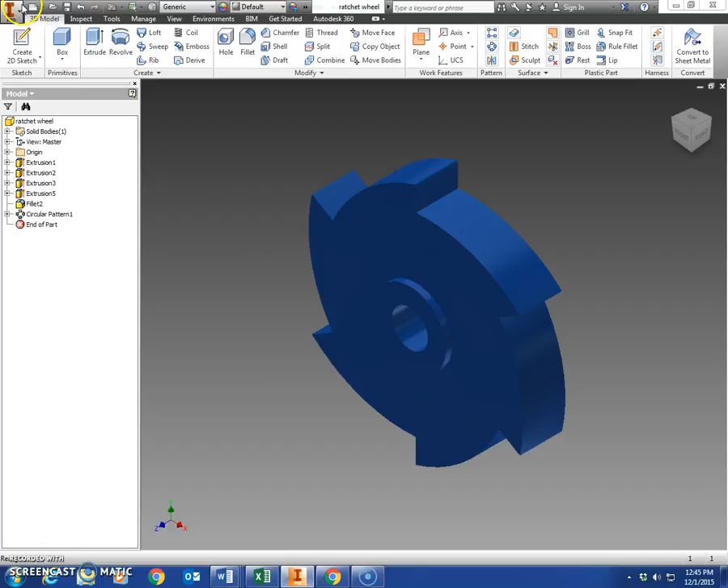Alright, so to make a new part, go on iPro, new, standard.ipt, and of course we're going to draw this in the X and Y plane. We want to make a 40-inch circle, and if we look back here at our dimension sheet, from the bottom to the top of that is 7 inches, or 6 inches actually. The 40-inch circle is 6 inches tall, so we're going to extrude that 6 inches.

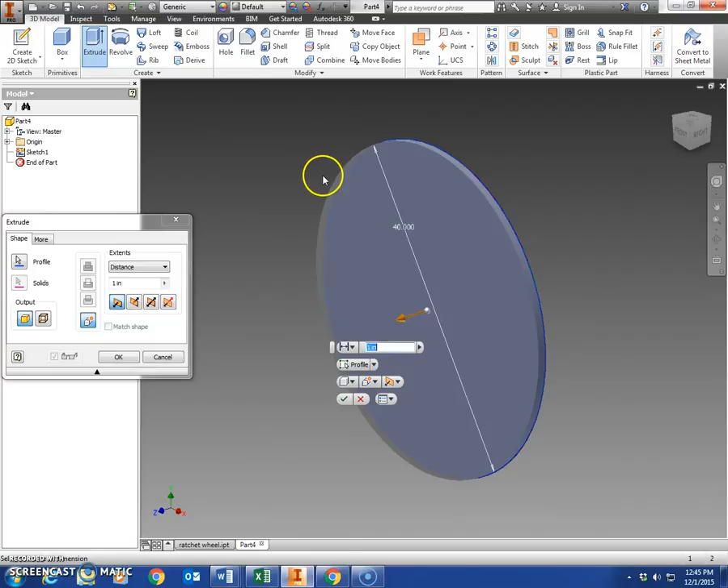Create your 2D sketch here on the surface. And we're going to make this a 12-inch circle. And this is how we get to our 7. Since last time we have a 6-inch circle here, we extrude this shape 1 inch. Okay? It's kind of hard to see there unless you highlight it.

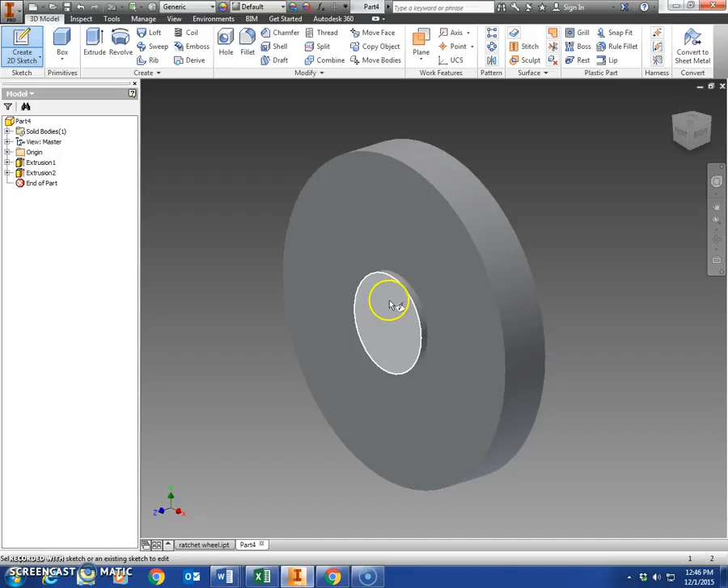And then we're going to make one more circle, a 6-inch circle that is cut out through the center. So 6-inch circle. Finish that up. Extrude all the way through. Alright, so we're starting to take shape here. You can see circle, 12-inch circle, 6-inch circle.

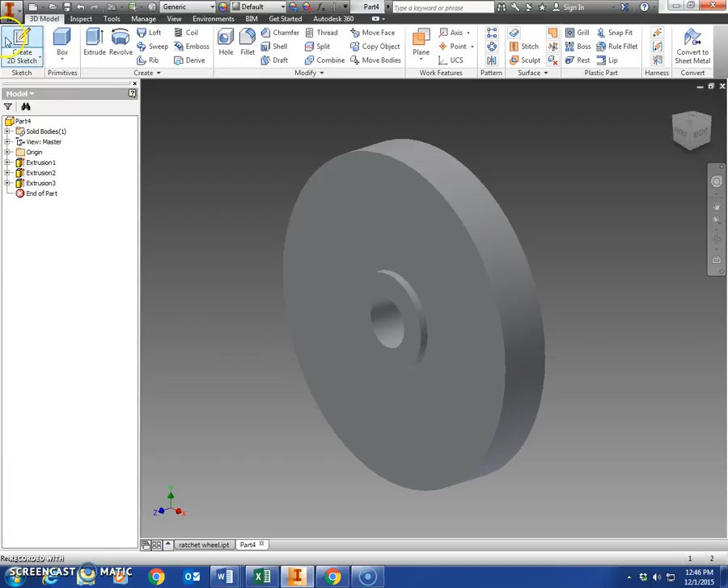Now to draw the tooth here. To do that, we're going to click on Create 2D Sketch and click this front face right here. And as you can see, we have a 4-inch line that comes down right here. Let's draw that.

4 inches. Enter. Now, what you can't see here is basically a line that comes straight down, and a line that goes out to the side of the circle here, and there's a 60-degree angle there. So we're going to draw this line on down to the center. We're going to draw it out to the side. Instead of typing in a dimension for inches, we're going to type in a dimension for degrees. We want 60 degrees. Hit enter, and it should have connected that.

Let me back that up a little bit. Line, drag it out here to the edge, okay, then change your degrees to 60. That was my mistake. Enter. Nope, went outside. We'll get this right here in a second. Line, out to the edge, and then when you tab over to degrees, make sure,

or tell you what, just go ahead and click here, and then we'll force it with dimension this line to this line. Now we'll force it to be 60. There we go. Alright, now this is where we can do something a little bit different.

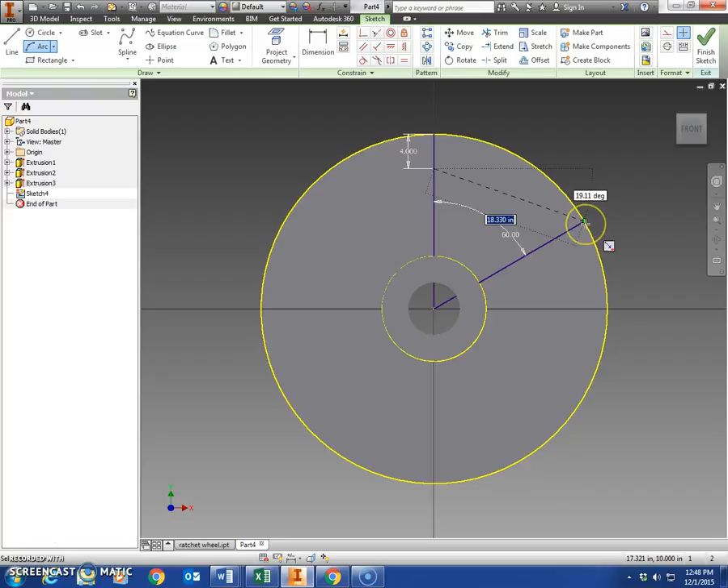We're going to draw an arc from the end of this 4-inch line right here, okay, out to the edge down here. Alright, and then when you do that, it wants you to give an angle. Okay, so make this 23. Oops, 23. Okay, enter. Now, you can trim all the rest of this stuff out. You don't need the rest of that. Alright, so you're left with that piece right there.

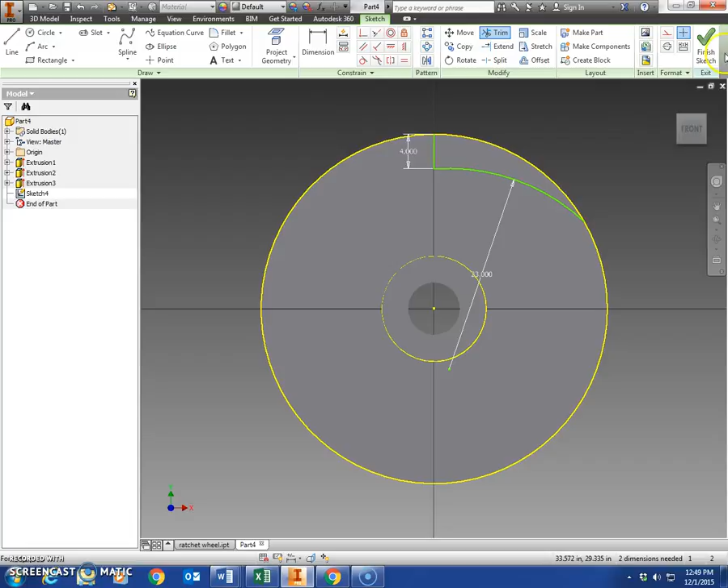Finish the sketch and extrude that piece. Change that to all. Click OK. Now, if we look back here at our dimension sheet, it says the edge of this is rounded off 1/2 inch. So we're going to fillet that 0.5 inches.

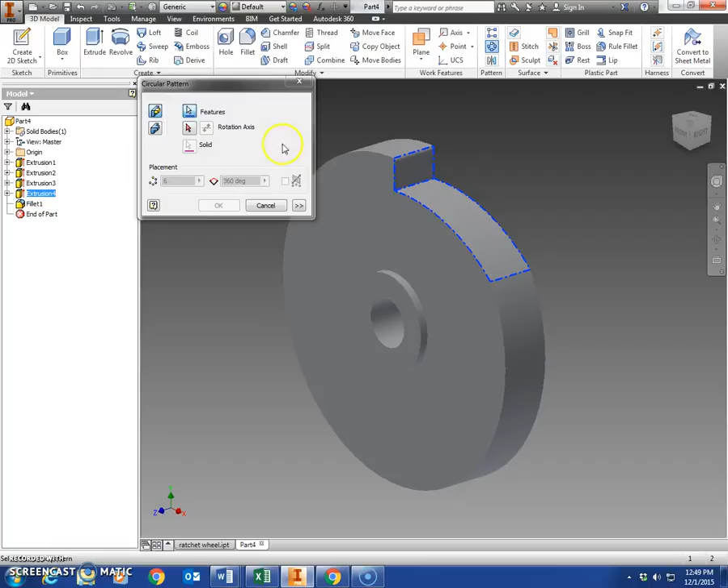Alright, now we're going to select circular pattern, which is right under rectangular pattern. We're going to click on that shape. Then we're going to select rotation axis and select the outside of the circle. And we're going to have 6 edges here. 1, 2, 3, 4, 5, 6. And lucky for us, it defaults to 6. We want it to go all the way around 360 degrees. So click OK. There is your ratchet wheel.

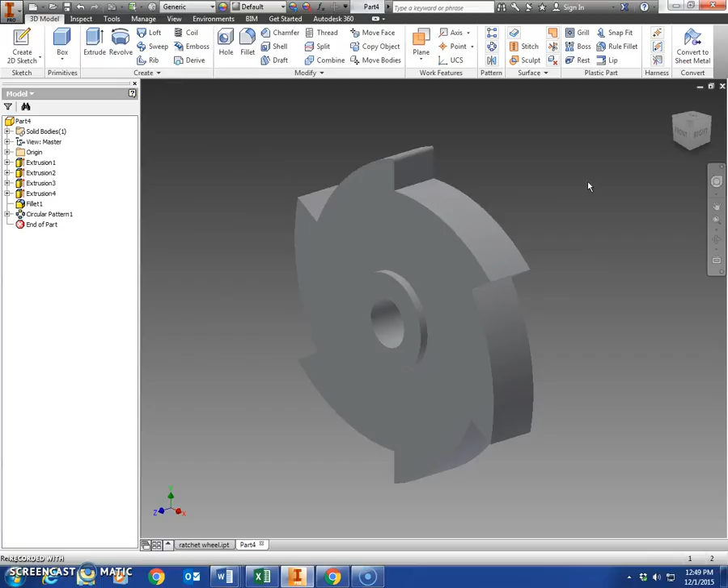Of course, if you want to color that, you can click on that, highlight everything over here, change the color up here at the top. Save that as ratchet wheel and show it to me when you're finished. And if it's for the red day, show it to me when I get back.